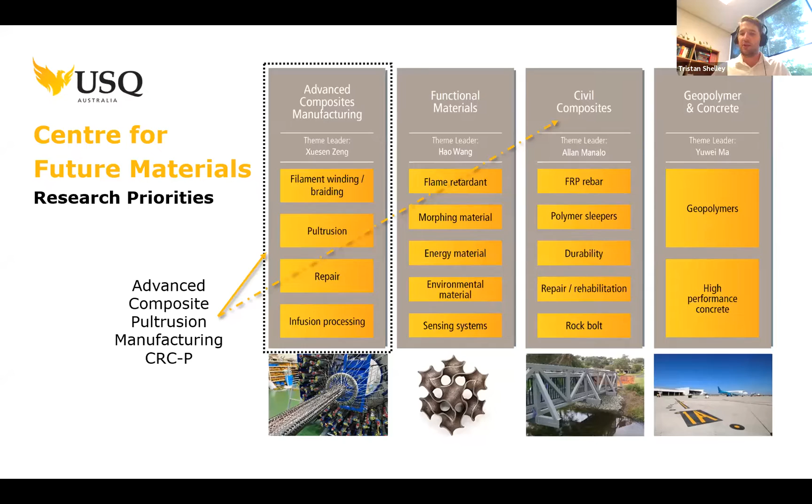We also have a Functional Materials stream, a Civil Composites stream, which this program indirectly links to, and then we also have a Geopolymer and Concrete stream within the centre as well.

So getting into more specifics on the project: pultruded products, and specifically Wagner's pultruded products, can be applied to a number of civil infrastructure applications.

For example, pedestrian structures - this is an example of a mangrove facility in Abu Dhabi. One of Wagner's biggest businesses is electrical crossarms, replacing hardwood crossarms for electrical distribution, road bridges, and other civil structures such as jetties.

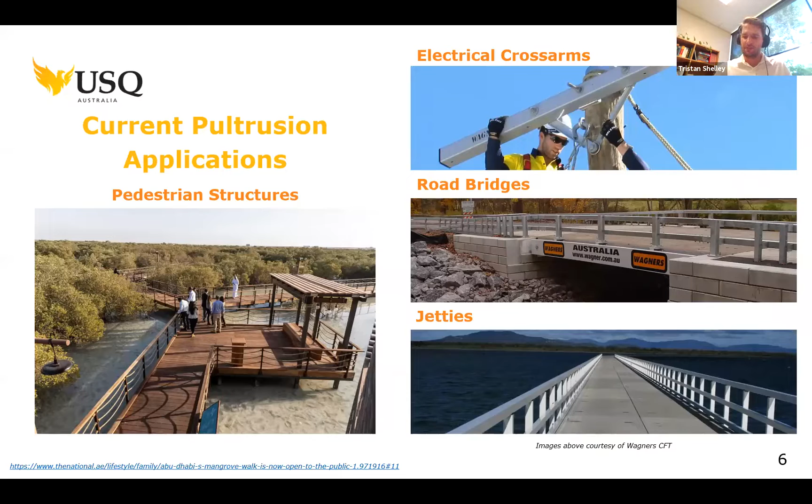As mentioned before, the primary technology that we're working with is pultrusion, which takes dry fibre in rovings or tows that goes through a wet out process, whether that's resin bath or resin injection. That then leads into a curing die or a heated die, where solid product exits the pultrusion die, is pulled through pullers - there's different varieties and styles of pullers - and then is cut at predetermined lengths.

The resin bath is more of an older technology, and this program focuses more on resin injection. USQ also have a Pultrex pultrusion machine, a commercial size pultrusion machine, in which we can trial different novel techniques and methodologies that can't be attempted on a full scale or a machine being used for production.

A few different ways of delivering the fibre to the pultrusion dies: there's just basic creel delivery with unidirectional fibres, and also off-axis or chop strand mats, which are then wet out and go through the pultrusion process.

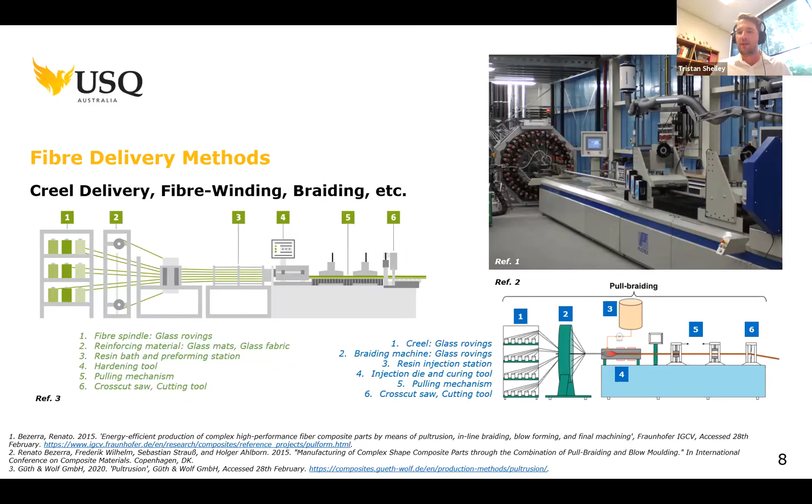Just so everyone is aware, we have acquired a dual ring braider for our pultrusion machine at USQ as well. It's a T4L dual ring braider, which we will be using for this program, similar to the top right figure on this slide.

A little bit of a busy slide, but it gives an overview of the pultrusion manufacturing process and how we are taking it and breaking it down into smaller bite-sized pieces for the research which we're conducting as a part of this CRCP.

We have the fibre delivery, which is our Work Package 3, or fibre architecture, which is looking at analysing and simulating the fibre delivery process and looking at ways of improving the fibre delivery for a reduction or elimination of defects through to the pultrusion dies, and to look at different techniques for improving the performance of the finished pultruded product.

Work Package 2 is looking at the fibre wet out, mainly focused on injection, as that's what our industrial lead uses for production, and using resin bath where necessary for more research activities to feed into production for Wagners CFT.

We're also looking at the flow analysis of resin through fibre stacks, which I'll touch on more later. Work package 1 is looking at the heating and curing of the resin through the pultrusion process, through the curing die, looking at how potentially additives, better functionality of the pultrusion will change the cure kinetics, and also looking to predict how changes in the manufacturing process will affect the final cure percentage or degree of cure of the pultruded product.

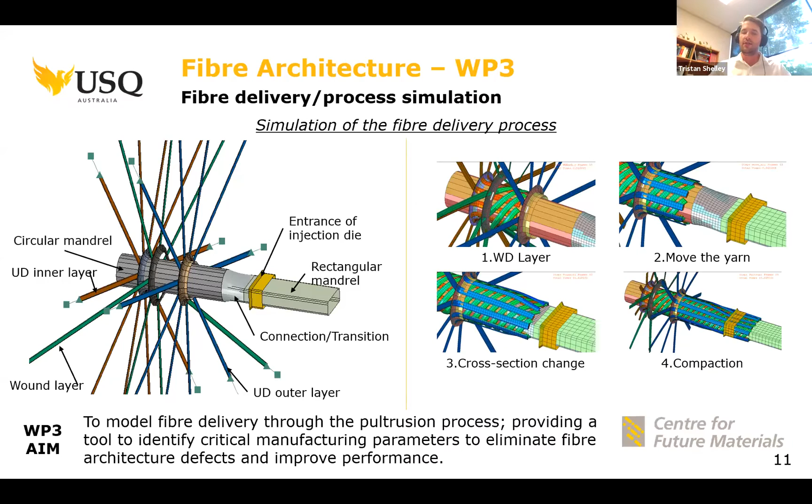Looking at the image on the right-hand side, the top left simulation is the delivery of the wound layer into the process and the unidirectionals. We then move that fiber stack along the mandrel as if it's been pulled through the pultrusion process. A change in cross-section creates defects that can arise as a result. There's also a compaction process as the fiber stack heads into the injection die and the curing die. Using these techniques gives us a better idea, prior to actually making changes on a production line, as to how they're going to affect or influence the quality of the product at the end of the day.

As I alluded to briefly before, we're looking at how defects generate, whether we can predict those defects, and there are a few different stages within which defects can form. One is the deposition of the fiber onto the mandrel when pulling through unidirectional fiber or depositing fiber from the winders onto the mandrel. The second is the transition between the circular mandrel into a square hollow or rectangular hollow section, if we're not pultruding circular sections. There's also some deformation that can happen at the entry to the injection die, and then as the final stage, compaction into the curing die.

I've not alluded to point 4 here, which is some deformation that can occur due to the injection of the resin into the fiber stack. This isn't being looked at in detail in this work package, but will be looked at in detail in work package 2.

There are two main mechanisms that cause the defects: the shear forces between subsequent layers, and the compaction of the fiber stack at various stages of the pultrusion process. Using finite element analysis to predict these, we need to find some way, without the model being too cumbersome or unable to run within a realistic time frame, of representing individual tows or individual rovings in an FEA model.

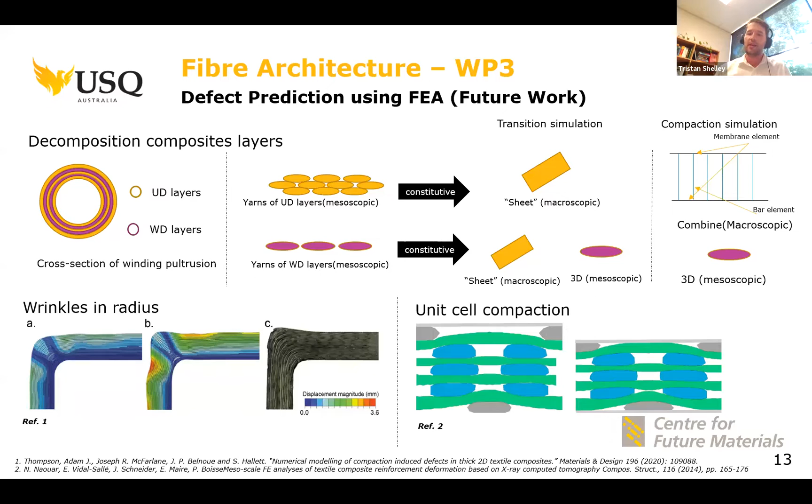Such as a membrane or a shell element or something similar. Apologies if you're not up to speed with FEA terminology, but we're looking at a way to represent the individual tows on a much higher, macroscopic level, so that we can quickly run simulations that give us an indication of how changes will affect the final product.

Moving on to work package 2, this is the infusion work package. We're looking to model the resin injection pultrusion process, providing tools to improve the wet out rates, which in turn allows us to increase speed, and to study novel techniques that may assist us in accelerating the penetration of the resin through the fiber stack.

Just a couple of examples here: blue is no resin, and red is infused resin in the stack. We're looking at, over time, how the resin will penetrate the fiber stack with different porosities, different resin viscosities, and different line speeds. Ultimately, what we're targeting is to see how we can end up with a quicker manufacturing speed while still getting full infusion through the fiber stack.

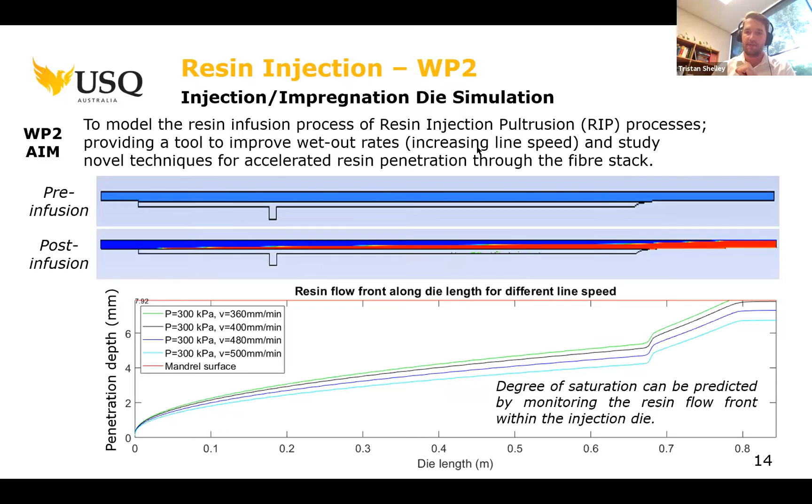So some ways that we've already identified to improve line speed, one of those is simply increasing the die length. That may not be an option for some manufacturers, because increasing the die length means you need a larger envelope within which to mount your dies, and it can also mean your die is closer to the pullers, so you may not have enough time without direct cooling for the product to cool before it gets to the pullers. But all things that can be worked around.

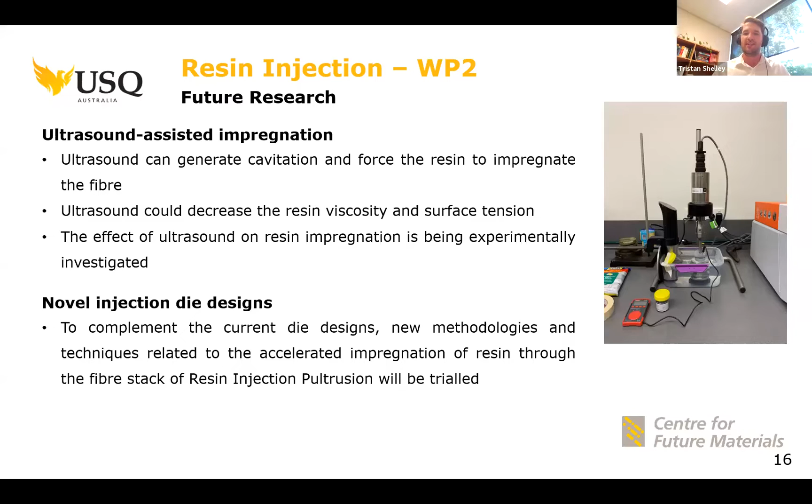Some future research happening is around looking at ultrasonic assisted impregnation, both looking at the ultrasonic treatment of the resin prior to injection, and also the excitation of the injection die for the improvement of resin wet out through the fiber stack, and also looking at novel injection die designs for accelerated impregnation through the injection die as well.

And lastly, resins and additives, work package 1. As a big part of this work package, we're looking at dielectric analysis, or DEA, to investigate the curing performance within the curing die, because the curing dies are a bit of a black box - we don't really know what's happening. DEA allows us to measure what's called the log ion viscosity, or ion viscosity. The sensor sends a current through the resin, and the higher the ion viscosity, the higher the actual physical viscosity of the resin. So you get to a point at which the resin has cured.

So what we're looking to do is fully understand the curing of the pultruded products through the dies currently, but then formulate some new methodologies to improve and accelerate that cure through the pultrusion die.

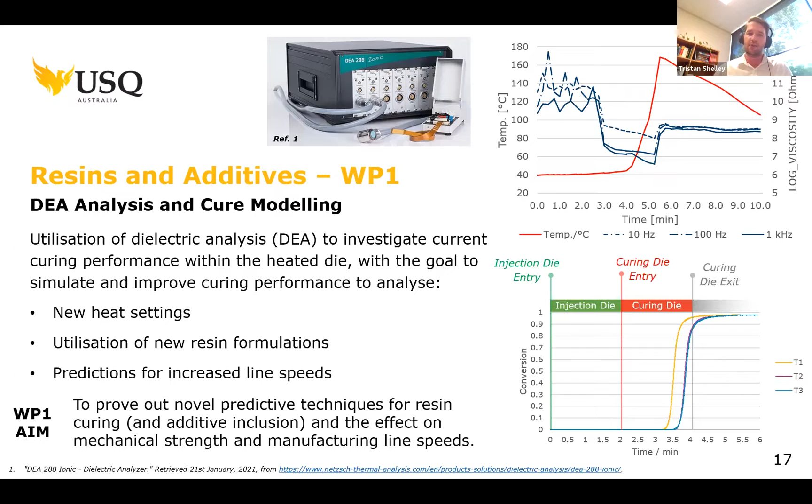One of those techniques is to increase the temperatures within the curing dies. Currently a ramp is used with a set temperature at the start and a set temperature at the end. But by increasing the slope of the temperature ramp, which shows an increase in the first heater zone setting, we're able to show that we can kick off the resin curing earlier within the curing die, which then allows us to increase the line speed of the pultrusion process.

Some future activities around work package 1: investigating the effect of those increased line speeds on mechanical properties, because if you've cured too fast, you may end up with micro cracking within the pultrusion, which may lead to a detrimental effect on the mechanical performance of the pultrusion.

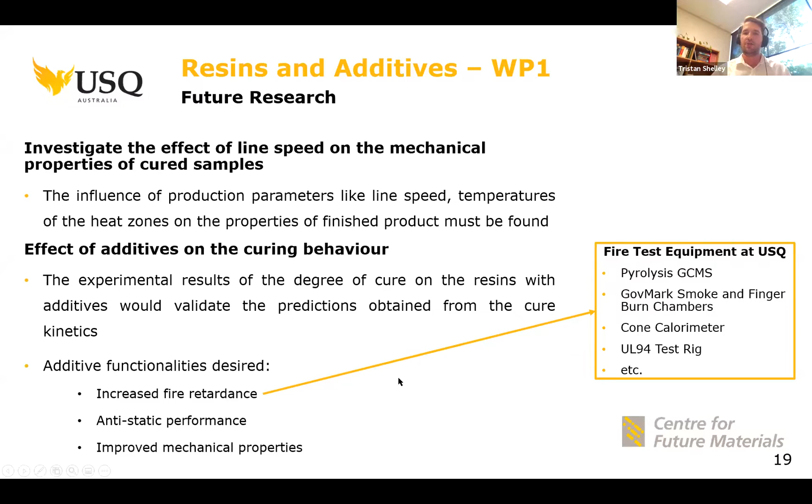So investigating all of the effects of the curing process, and also looking at increased functionality of the pultruded product through the addition of additives. The one major one we're looking at is increased fire retardance, which Dean will touch on in more detail later on. We have a large suite of fire testing equipment at USQ, which I won't go into detail with, but we're also looking for other functionalities such as anti-static performance and improved mechanical properties through the addition of some additives as well.

So that brings me to the end of my presentation. Do we have any questions from any of the attendees?

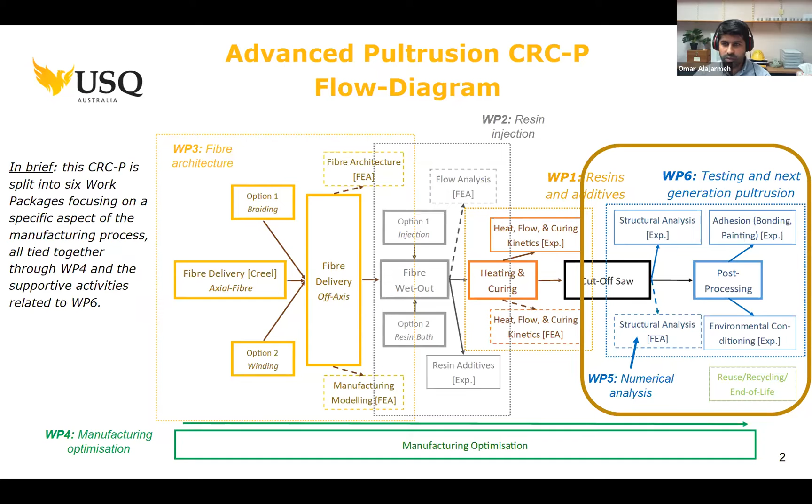Starting from the numerical analysis and how that connects to the experimental, and what we can do in terms of experiments in our facilities here at USQ. The point of having numerical simulation in this project is more about validating the experiment and going further to optimize the profiles and find out the critical parameters that can affect the structural performance of the pultruded sections.

So we have charted that, starting from the material constituent tests that we can rely on to do the pultrusion, then doing small scale testing to find out the laminate properties of the composites. After that, we can do large scale testing to simulate the real testing in the field.

That input will go to the FEA model to build up the model and try to validate the experimental results. It's not only validating the behavior or the failure, it's also validating the internal stresses inside the pultrusion and finding a great matching between the behavior of the FEA and the real testing.

In the next stage, we are heading to a parametrical study to assess the parameters and determine which one is critical, and how we can come up with an optimal design for the pultruded composites. If we see there is room for enhancement, we give a recommendation for the pultrusion to implement that suggestion, then go again to the pultrusion and extract some samples afterward to validate our recommendations.

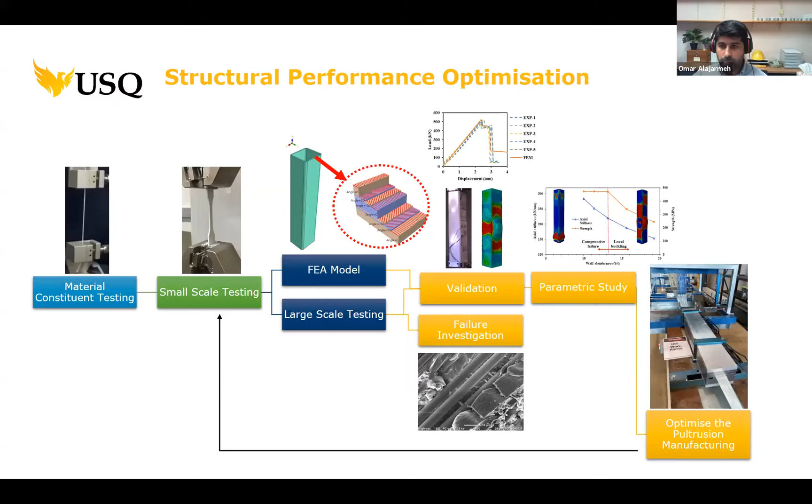We had a number of software options, but we are relying more on Abaqus to do some steps to build up our models and find the validation of the experiments. The good thing is we are not only looking for validating the experimental results, but we are looking for establishing a solid and sound methodology.

That methodology can validate the experimental results in the easiest and quickest way, and can run the models many times. We have implemented many approaches, and we ended up with a very good methodology that can capture the behavior of the composites and capture the instability of the composites, because we are talking about thin wall structures that suffer from instability behavior.

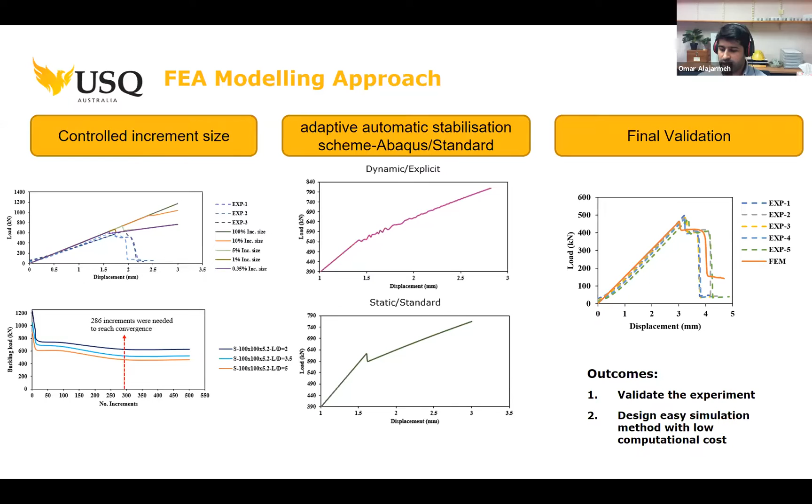After that, we plan to go to the parametrical study to select which parameters are critical to the pultrusion and how we can modify and enhance the performance of the composites. We set up very critical parameters, starting from geometrical parameters and layup parameters, and we studied all of these parameters separately and in combination to see the effect of these parameters on each other.

We found that some parameters are important, and others are very important for composites. This is the main point of doing FEA: to find the optimal design of composites and give confidence in the final product that there is no weakness in it afterwards. That affects the design, the material usage, the money and the profit after that.

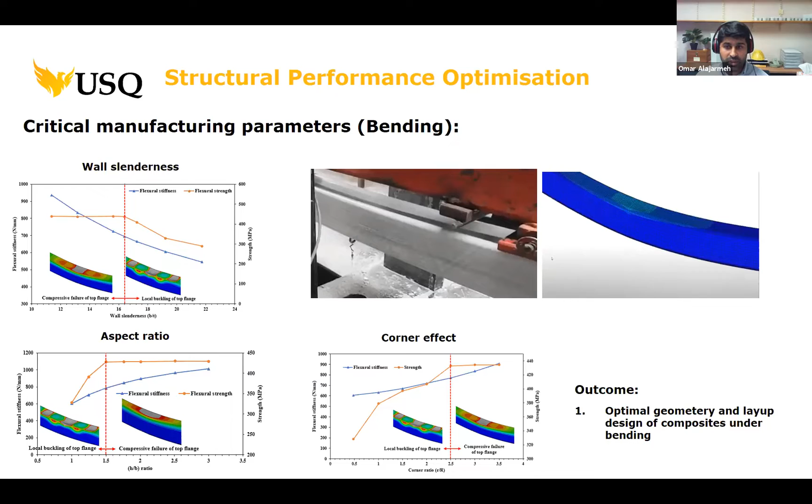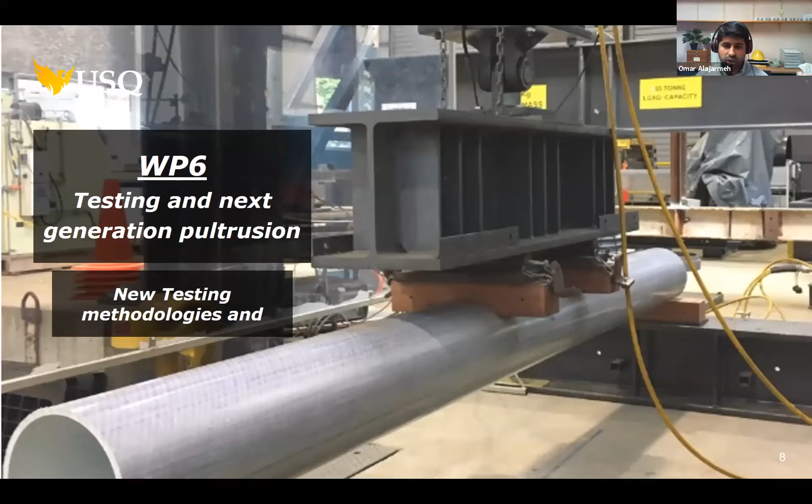So in the structural lab, we are testing the ideal sections, or the one with a full cure, and the one with different pultrusion manufacturing parameters, such as line speed, additives and all of these things. In practice, speaking about the hard work and testing for composites, how we can identify the structural performance of composites, and how we can suggest new testing methodologies that we can standardize after that, since there are no standards or methodology to test full scale composite structures.

Starting from our facility, and what tests we can conduct there: we can do structural tests, small scale and full scale tests. We can do environmental tests as well. We can do fire tests, preliminary tests on that. We can also do thermal and physical tests and checks on the composites.

Looking at the small scale tests, we have sufficient fixtures and jigs to do the standards assigned for composites for small scale testing, and we can do basically all the tests needed to characterize the composite. The purpose of doing that is to know the laminate properties of the composites, and for that to be a feedback or raw material for the FEA models, to build up our models afterwards.

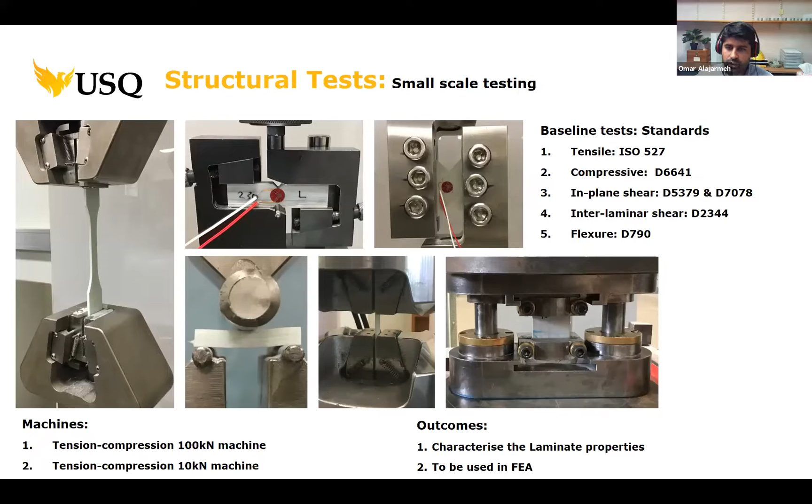Afterwards, we have the capacity to do full scale testing under compression, bending, shear, and all of these things. Those tests are validated from FEA, and by doing these tests we double check the structural performance of the pultrusion product after that. It's also about finding the true behavior of those things, to be used afterwards in the design of the structural elements.

We have sufficient tools, rigs and machines to do those things. We have three various size loading frames, up to 2000 kilonewton. We can implement columns, beams under those machines. We also have a fatigue rig with a 500 kilonewton capacity.

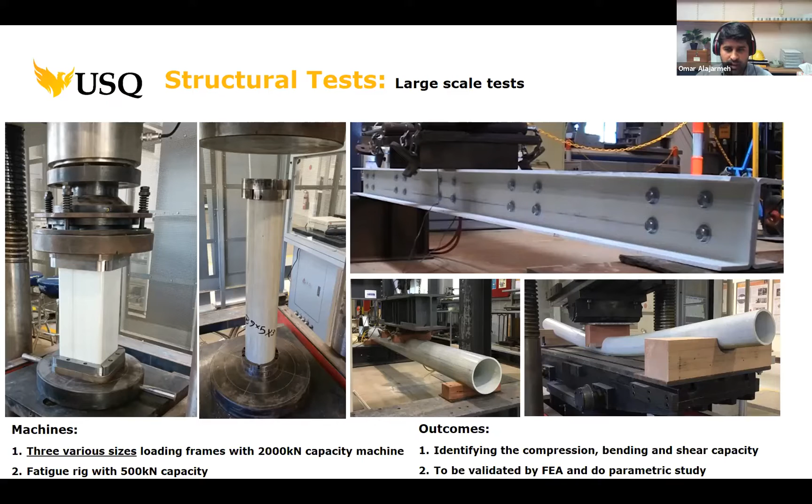After testing those things, we are not only looking at the load displacement behavior, for example, but we dig in deep to analyze the failure and the failure progression of those composites. The reason is to identify the weakness points, so we can make a recommendation for the pultrusion afterward: this is a weak point, you can implement or modify or strengthen it by doing these steps. We are using many microscopes that we have, and also SEM, so we can see the bonding and the interface between the fibers and resin, and what the interface between them is.

All of these tests we can do with a special touch from USQ. As we know, there is no standard for testing full scale structures in composites, but we were able to introduce and design new testing rigs that we can rely on to get the true behavior of the composites, starting from end fixtures and loading points for the bending. We were able to get a true behavior out of those composites and get rid of any failure concentration, failures from stress concentration at the ends and the interface between the loading point and the cross section.

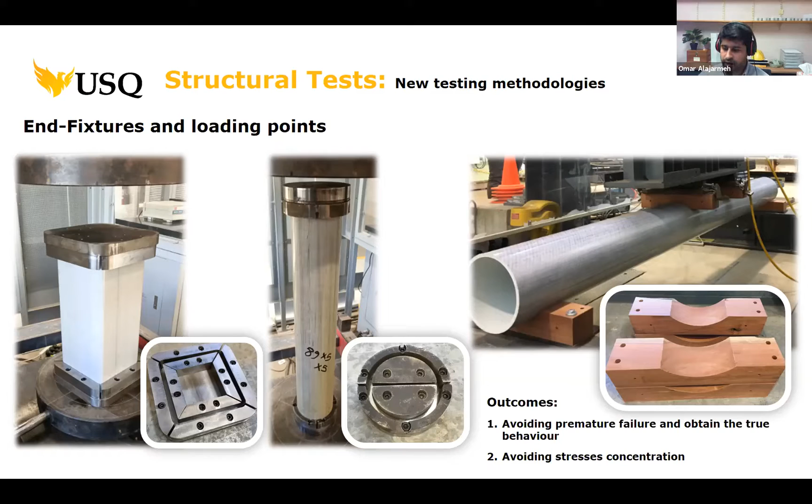Beside that, we have also been successful in suggesting new methodologies to characterize the curved sections, which no one has done before. We were able to do coupon testing in compression and tension using a special design for end fixtures. We also developed a transverse compression methodology for rings or pipelines, to get rid of the ovalization that happens when you apply a load to the ring or pipeline. That gave us very confident and sound results afterwards.

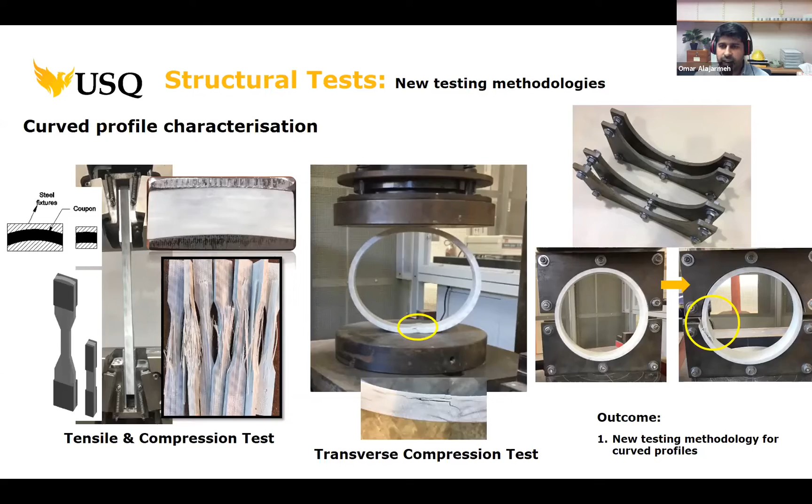I need to highlight something here. More important is we have special tools such as DIC, not only to capture the results during the test, but also to validate and give us confidence in what we are doing here at USQ. We also double check the FEA models using the DIC, and even double check the theories built up before on the composites. It helped a lot in identifying the local bucklings and identifying the failure features of the composites.

After the pultrusion, there are many post-processing steps that the manufacturer uses, especially drilling holes, inserting some insert inside, doing bonding and painting. We were able to benefit from the square sections to introduce new cross sections, like the figure you see on the left hand side at the top. We were able to introduce new I sections, C sections, and L sections out of the end product, square end product, and the results are quite sound on that. So we can also benefit the manufacturer to increase the product sections and increase the design guidelines on that.

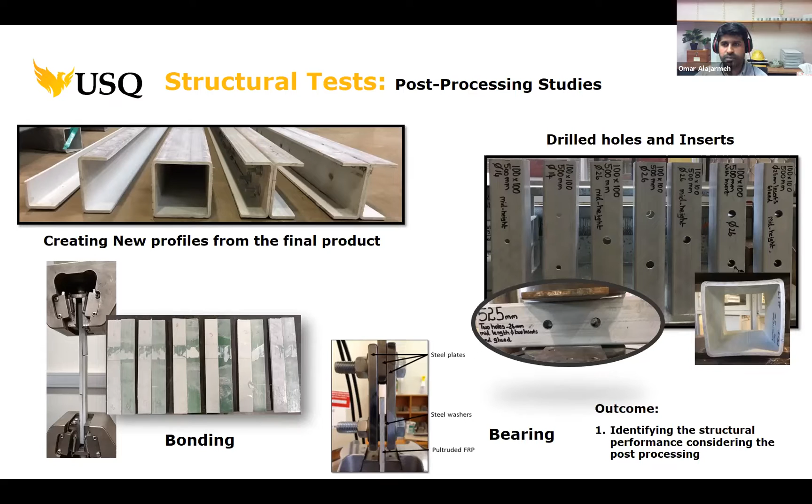Aside from structural testing, we have done some preliminary fire testing on composites. We have two main rigs to test the smoke density of the composites, toxicity, and also to characterize the ignition properties, starting from the start point of the ignition and the duration of the ignition. You can see here some of the test results on the composites that we have done. That can also be extended to test the fire performance of the composites with fire retardant and with special painting and coating of the composites.

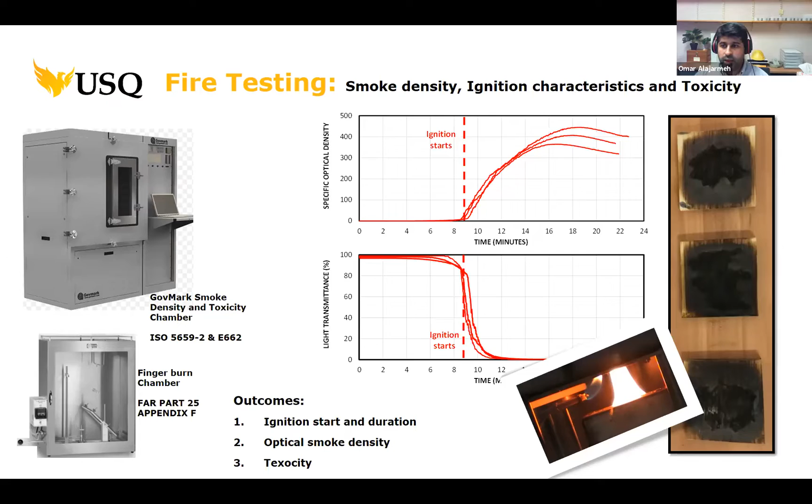We also have done, and are managing to do, environmental testing of the composites, relating to accelerated ageing applied to the composites to find out the life prediction of the composites. We can apply many conditions on the composites, starting from UV radiation, going to the hygrothermal effect including moisture and temperature, and we are also going for elevated temperature testing of the composites. The aim of that is to initiate some master curves from the real testing time and extend that to see the life prediction of the composites in years.

All of these things and facilities are happening at USQ. We are also managing to do as many tests as possible in the future, and we have the ability to expand our research further. So this is the end of my presentation, and I'm happy to answer any questions from you guys. Thank you so much.

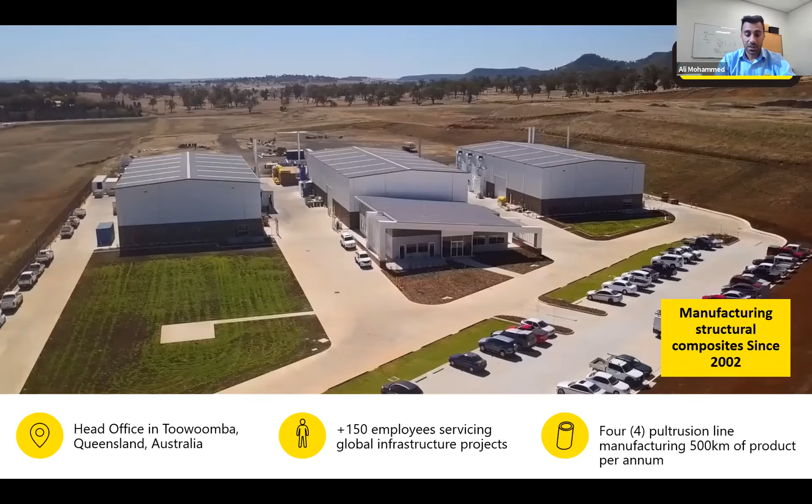So a sneak peek about the factory. As you can see here, these are our 4 pultrusion lines. The first pultrusion line started back in 2002, manufacturing all various sections. And as you can see in the back, that is the glass room where all the glass is kept, and also where the unique pull winding process of Wagners CFT is located.

With this unique pull winding process, it's giving us the high fiber content, which will result in better mechanical properties, as I will explain in more detail in the coming slides.

Next, this is a summary of what we are currently manufacturing in terms of structural hollow sections. So we manufacture circular hollow sections, square hollow sections, and rectangular hollow sections, and each of these can be produced with different sectional geometry and properties, and with different wall thicknesses to cover a wide range of applications.

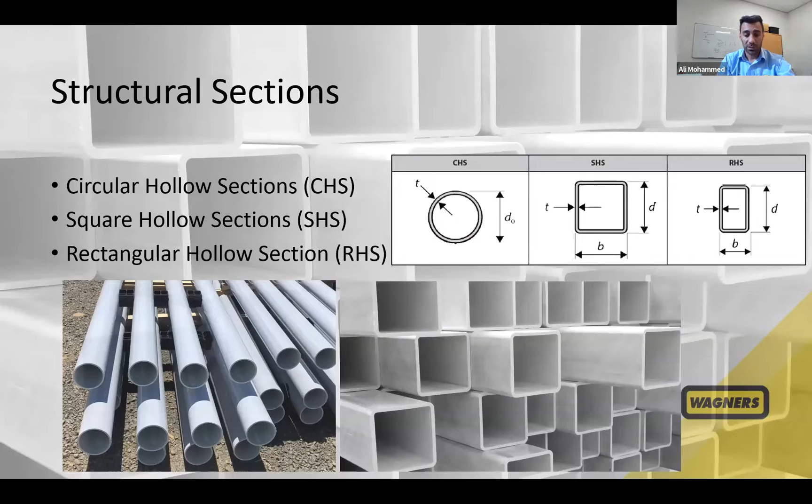that would definitely result in very high mechanical properties, as we can see in the next slide - the mechanical properties of Wagner's pultrusion with a tensile strength of over 600 MPa and a modulus of over 35 GPa. These are the characteristic values as per ASTM D7290.

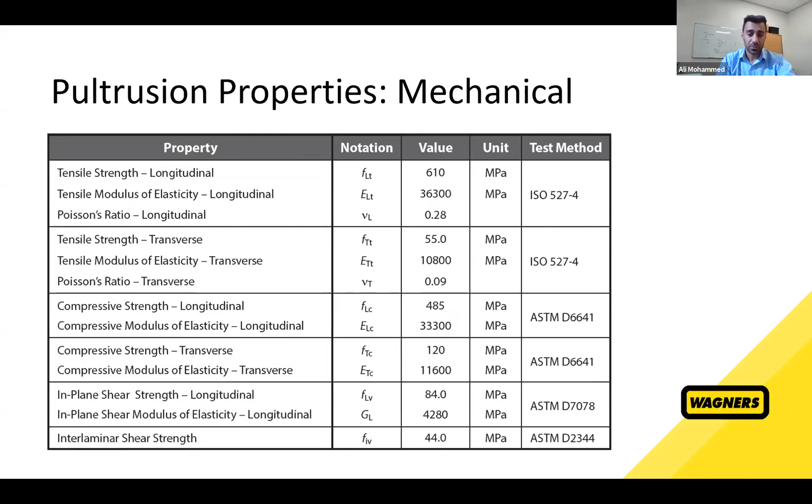So all these products require minor finishing, minor modification on the surface to suit that specific application. For example, for the cross arms, we need special surface treatment to give it the proper electrical properties, and this kind of surface treatment is not required for the pile - it's the same for every single application.

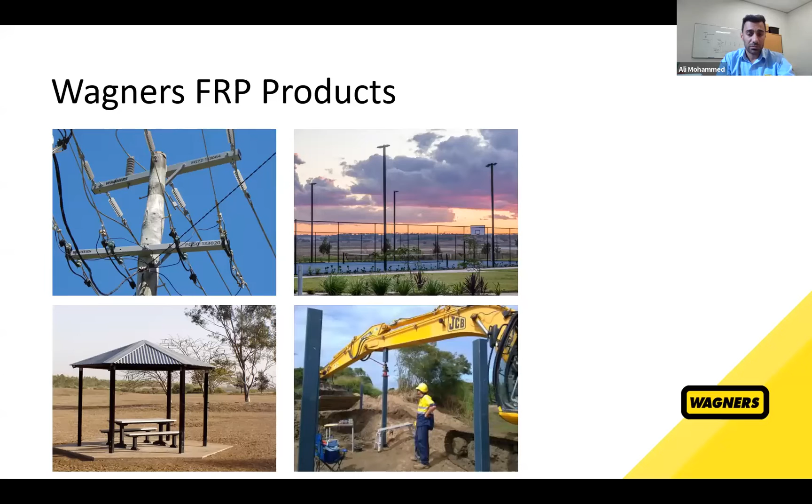With this bonding technique, we can produce and fabricate larger structures, as we can see in the next slide, with a few examples where Wagner's FRP sections have been used - in road bridges, staircases, and many other structural applications, like over 1,000 boardwalks and pontoons, and many other marine applications.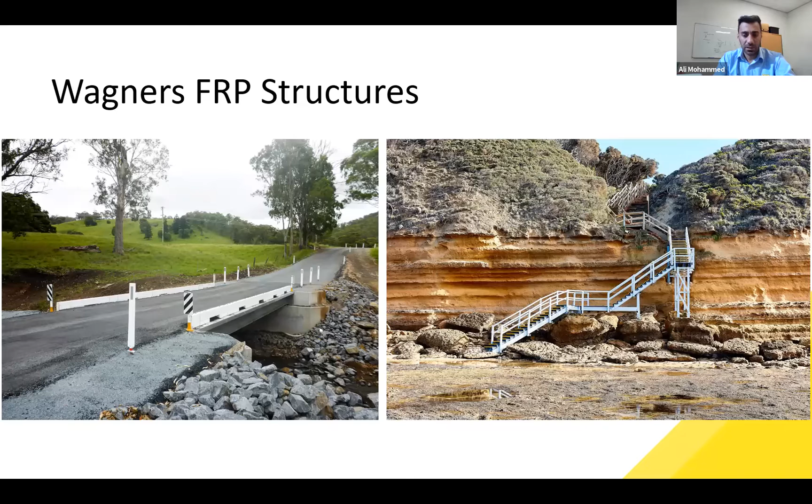So the next venue that we need to conquer is the FRP utility pole. Why does the next section need to be used as an FRP utility pole? Due to the huge demand in the market for FRP utility poles, or FRP poles in general, we decided to jump in with bigger sections to meet the structural requirements of utility poles.

And why FRP? As you're all aware, because of the superior properties of the FRP composite material compared to traditional materials such as timber and steel, and also the environmental performance of FRP composite material in general, where less carbon emission is produced due to the overall process of FRP fabrication and utilization, as shown by many studies about the life cycle assessment of FRP composite material.

So for the design requirements of FRP utility poles, there are various requirements to be met to fabricate or manufacture an FRP utility pole. The first one is fire resistance. The fire resistance of FRP utility poles needs to meet the BAL 40 requirement, as you can see in this photo - it's the next phase after bushfire, where the first phase is the flame zone, and the next one is BAL 40, which is a very harsh condition to resist.

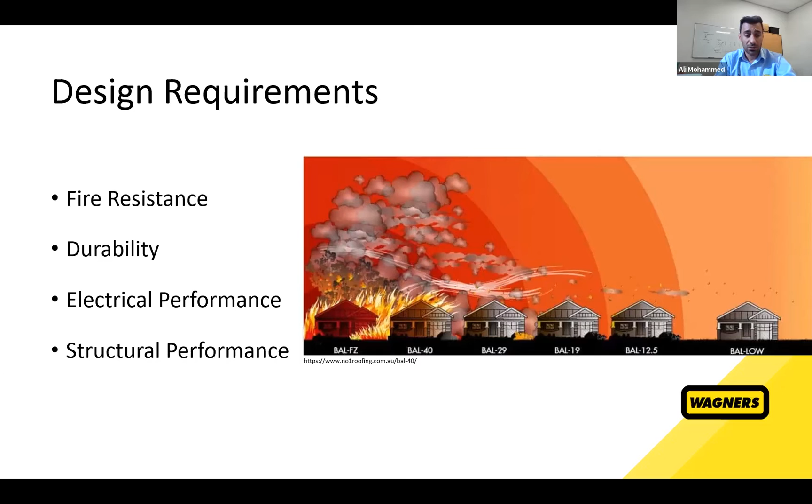And the final one, which I'm going to talk mainly about, is the structural performance of the future FRP utility poles. So the FRP utility poles need to meet the serviceability limit state and the ultimate limit state as per AS/NZS 7000:2016, which is the Australian standard that has been used for the FRP utility poles.

So what is being done here is we have done structural testing according to AS 7000 on the current profiles that we have, to establish the flexural strength and the full section flexural modulus on the current profile, and extrapolate the values that we got to the design of the future profile to meet the same structural requirement.

In the next slide, the full scale testing is shown, following AS 7000, and this sample is being loaded till failure. As you can see in the graph shown in this slide, the sample behaved linearly till failure, which is expected from FRP composites.

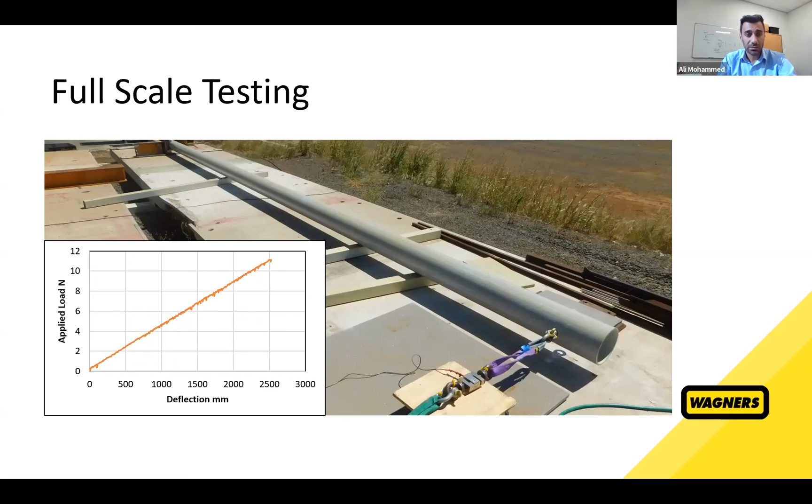So following this full scale testing, before going to the structural analysis, we need to talk about the failure mode, how the sample failed. The sample failed at the ground line, at compression failure, at a moment of 110 kilonewton-meter, which is what we were expecting.

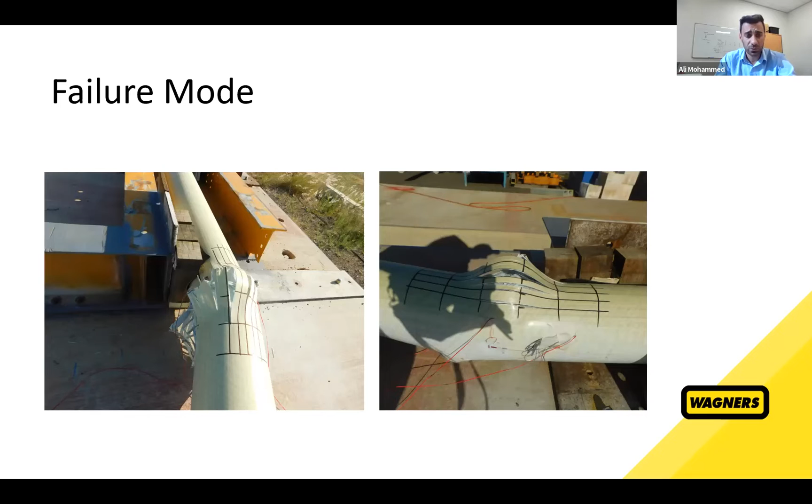Following this full scale testing, structural analysis has been done using SpaceGass software, and a spreadsheet has been developed to ascertain the sectional properties that we need to achieve the design requirement for a future utility pole, which we need to meet at 4 kilonewton and 6 kilonewton tip load at the top of the utility pole.

Further FEA analysis has been done where the experimental result has been verified, looking at the layup and the wind angle of the future FRP utility pole. As we can see in the graph on the left side, the experimental results are matching the first model that has been done on the current wind angle with 50 degrees. Then with the validated model, the wind angle has been changed and reduced by 20 degrees, resulting in an increase in the flexural stiffness and flexural strength by around 7 to 8%.

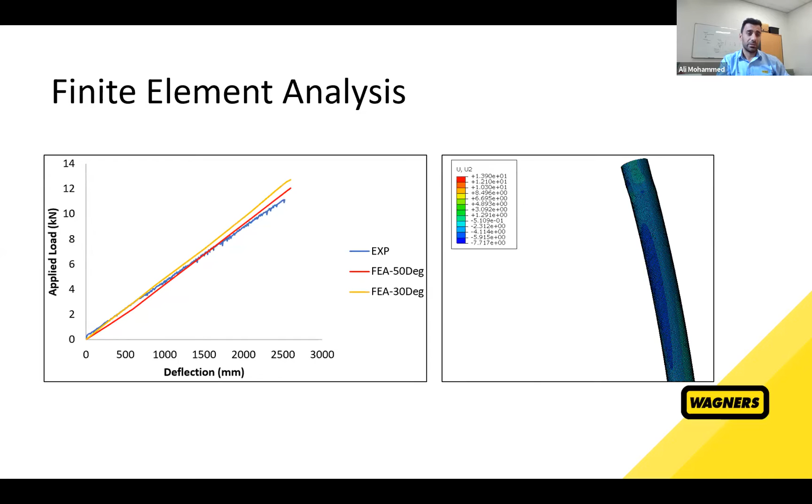Here I conclude my presentation for today. I have presented various FRP products made of our FRP sections, and what I've presented are only a few examples of what's actually been used. In this photo, you can see our FRP composite product used by another company, Composite Stands, that we worked with together to develop this product.

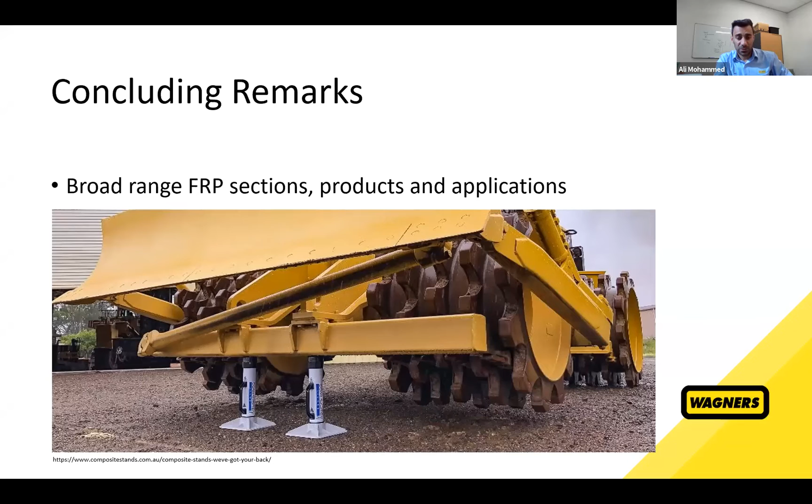It's being used as a jack stand for heavy machinery, replacing steel jack stands, and the weight of this composite stand is a fraction of the tremendous and heavy steel jack stand. So if you have an application and you believe FRP composite would be the solution, feel free to contact us on my email, and we can work on developing the future product together. Thank you for listening, and let's see if there are any questions.

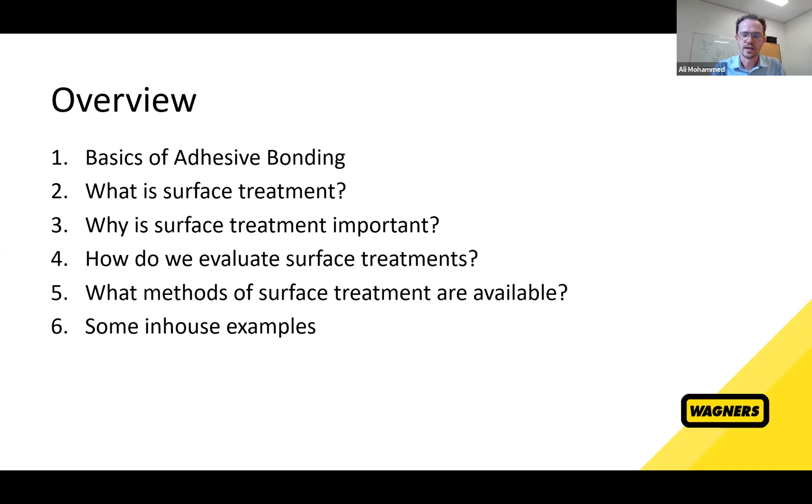Just very quickly about me, I'm a mechanical engineer. I've been here almost 3 years, and I work in the R&D department, doing a whole array of things, but particularly on this subject, a lot to do with bonding, polymers, adhesives, and coatings, all very relevant to Wagners Composites as a whole, where we do bridges and boardwalks, and we paint things and bond things together.

So adhesive bonding, what do I mean by that? I mean the process whereby you are joining materials together with an adhesive. The materials can be of the same type, or they can be dissimilar types, but it finds an application in almost all industries. Aerospace, wind generation, power generation, medical, almost everywhere you've got applications of adhesive bonding and bonding materials together to form a structural bond, so to speak.

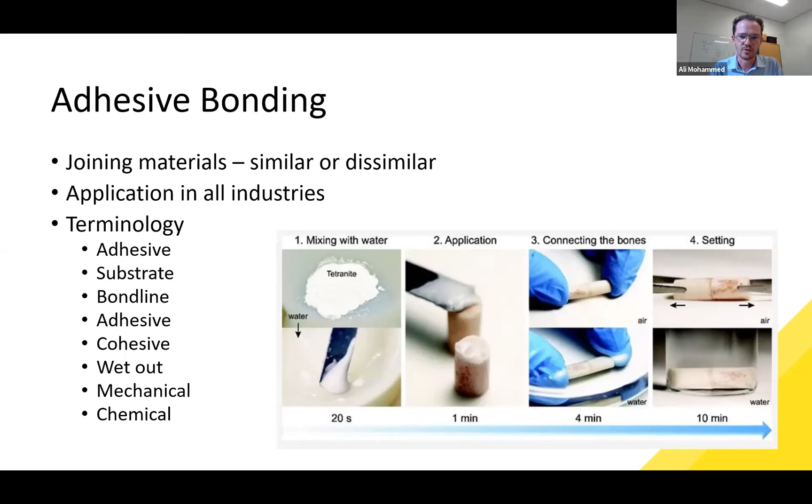A whole bunch of different terminology is used in this field, adhesives, substrates, bond lines, etc. I'll try and keep it as basic as I can for those of you listening who are not too familiar with this field. But just on the right there, for interest, they've even developed an adhesive for repairing bones up in the space station. They call it tetranite, and it can be used to glue bones together. So even our astronauts are using adhesives for medical purposes. Such a very broad range of industries, and it can be quite amazing to see it being used for a variety of different things.

So the bond itself, the adhesive bond, is formed typically of the substrates, which are the materials you want to bond together, and then the adhesive. Obviously, it forms a sandwich of the two substrates and the adhesive in between. The area directly where the adhesive touches either substrate is called the bond interface.

So the role of the adhesive is to essentially form a structural bridge between the two substrates, and that takes the loading conditions and also transfers the stress from those loading conditions between the two substrates. Effectively, you want to join two substrates together to form a cohesive material via this adhesive.

The main critical requirements for an adhesive bond are obviously the adhesive properties themselves have to be strong and tough, and have the right elongation to suit the expected stresses and loads. Then the details of the actual interfacial bond between the adhesive and the substrate - you want either a chemical bond, a mechanical bond, or ideally both. Then the actual wet out of those substrates via the adhesive is another function, and also governs the interfacial strength. So today we're looking in depth at the wet out, or how the adhesive coats each substrate to give a very high surface area for the bond, so to speak. Obviously, there are other aspects to the bond as well, such as mixing your adhesive properly, curing it properly, etc.

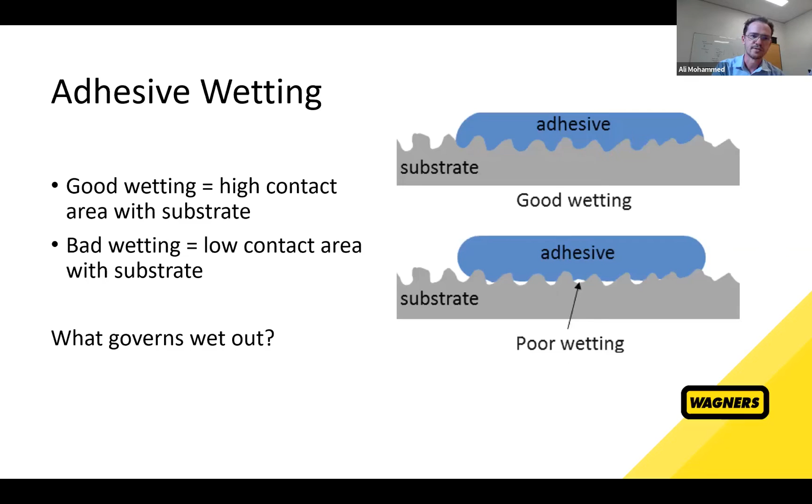Well, let's look at what governs wet out, and that is a term called surface energy. All surfaces have what's called surface energy - essentially the attraction force on the surface of that material. High surface energy materials have atoms very strongly attracted to each other, resulting in a very high attractive force on the surface. The opposite is a low surface energy material where the atoms are not so strongly attracted to each other, giving a low attractive force on the surface.

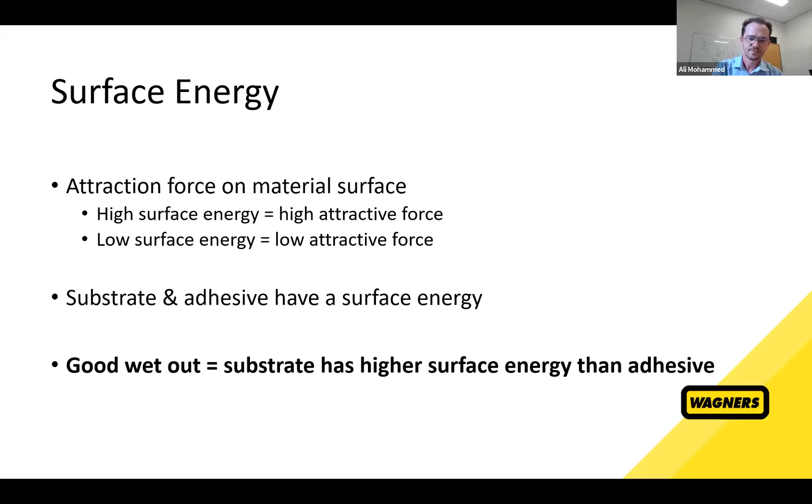Both the substrate and the adhesive have a surface energy, and it is measurable. To get good wet out where the adhesive flows across the surface well, you want a substrate with high surface energy, and ideally a higher surface energy than the adhesive. High surface energy is a high attractive force, so the adhesive is going to wet out the surface.

When we look at CFT and composites in general, there are a few difficulties with looking for high surface energy for good wet out. The main one is that glass fiber composite has an inherent low surface energy, so it's difficult for an adhesive to wet the surface out.

So from the get-go, we need to look at options to increase our surface energy for better wetting out of the adhesive. We also use other materials here on site that are all very low surface energy materials - polyester plastics, polyolefin plastics, and also fluoropolymer type materials. These are all low surface energy materials, so in general we have a difficult time bonding here on site.

The other aspect of a good bond, aside from surface energy, is the presence of any contaminants on the surface before you bond. Contaminants can take the form of dust or fingerprints. A big one is obviously silicone contamination. Silicone is quite often banned in a lot of industries, aerospace et cetera, where they do critical and large scale bonding, because it is such a bad industrial contaminant. Even a tiny amount of silicone on the surface can affect your bond quite significantly.

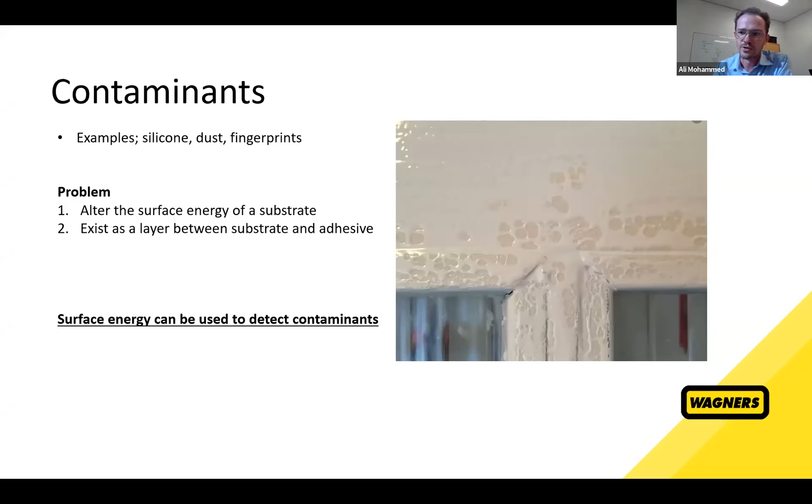So just to summarize the last couple of slides, what do we need for good wet out of our adhesive onto these substrates? We want high surface energy of our substrate so that adhesive flows across, and we want a clean substrate, so no contaminants on the surface. If we achieve both of these things, we should be getting closer towards a good bond. Obviously, there's a few other factors as well. But how do we actually assess whether we've achieved a higher surface energy and a clean substrate? How do we assess and evaluate our surface before we bond to it?

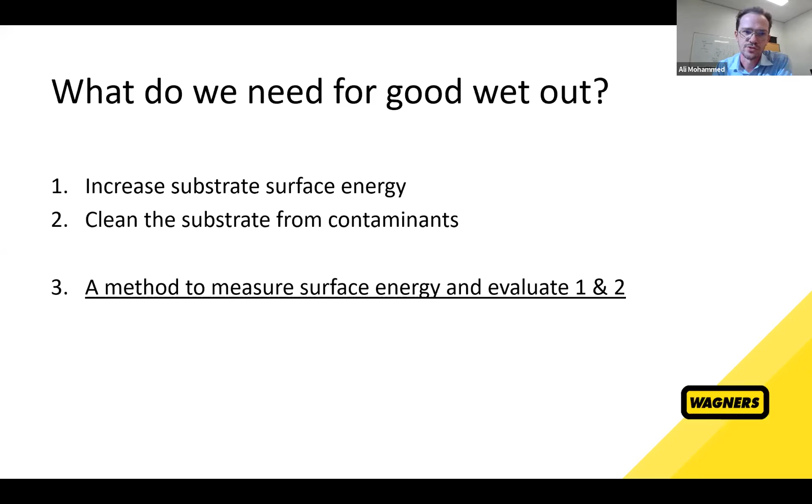Before I answer that, I've got a real life example I found from back when the F111s were in operation in Australia. They were finding the sandwich panels were delaminating and debonding, and they found a large number of them were from repairs where there was no surface preparation. It highlights how important surface preparation is to eliminate or reduce your defects and improve the consistency of your bonds.

So we've asked ourselves, how do we actually measure or evaluate the surface energy of a surface? The most common way to do it these days - back in the day they used dyne pens and various other things, whereby you were given a set of pens to mark a surface, and that pen would indicate whether the surface was high or low surface energy and give you a rough approximation. But these days we've gotten a lot more advanced.

The best way to do it is if you've got a consistent way of measuring. Your substrate's the variable, and you want to know what the surface energy of your substrate is, so the way you measure it should be consistent. You start off with a liquid, most often some sort of very clean water, and use a water drop and how it interacts with the surface to assess the surface energy of that substrate.

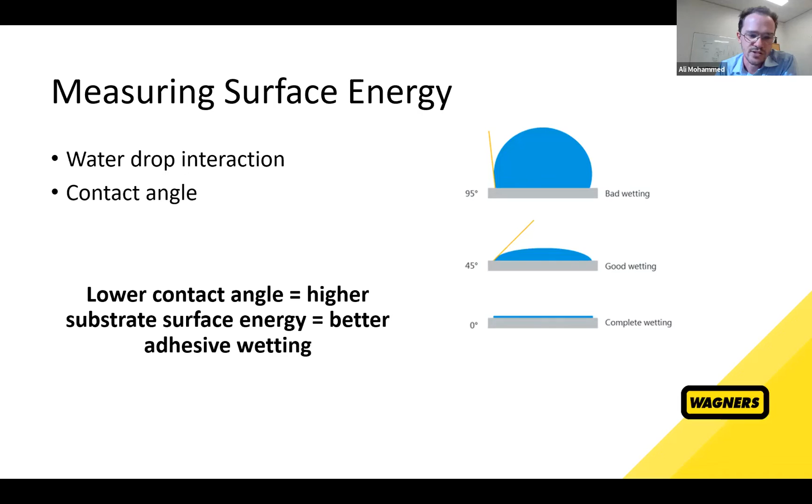If you can somehow apply a drop of water to the surface and look at how the drop interacts, you can get a very consistent way of measuring the surface energy of that surface. Now, they've made machines that do this. A variety of different suppliers make machines that fire a drop of water at the surface and then can tell you exactly what the contact angle of that water droplet to that surface is. You can then use that to consistently determine the surface energy of your surface.

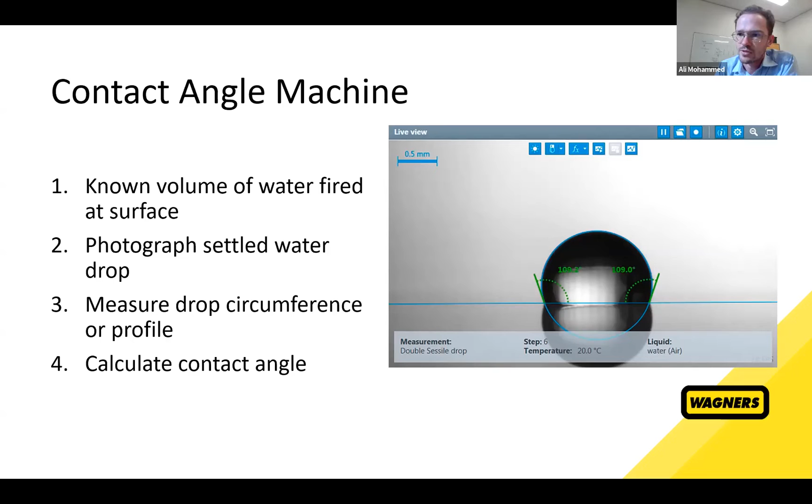It fires a known volume of water at the surface, and then photographs the drop sitting on the surface. Then, either from a side profile or top view, it calculates the contact angle of that water drop. On the right, you can see one of the many pieces of software that can do this process. Here at Wagners, we've got a very portable piece of equipment that does this for us. We can use it to check the contact angle of almost any surface, whether it's horizontal, vertical, or upside down. These are available from quite a few manufacturers around the world.

We found it to be very handy, and it's still teaching us things every day in terms of our bonding process and things we do here at Wagners.

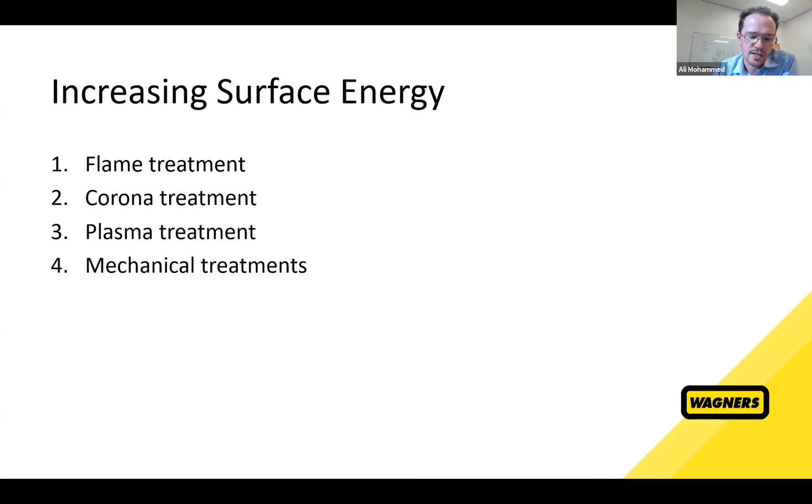So if we go back to our list of what can we do to better prepare our surface, one is increasing the surface energy, making the surface easier for the adhesive to wet out. There are many options available for increasing the surface energy of difficult to wet substrates. Here are a few: flame treatment, corona treatment, plasma treatment, and mechanical type treatments. We've tried all of these here at Wagners, and I've seen good results with some and not so good with others. It's very dependent on what your application is and what you're using your substrates for.

The first one, and probably one of the most common, is a flame treatment type unit. It's a gas flame, commonly butane or propane or some sort of flammable gas, in the shape of a very high energy jet. It's typically got two cones - the jet, and the inner cone, the darker, more vivid blue cone, which is the reactive part of that flame. When that flame is run over the substrate, it gives the substrate a higher surface energy because the flame is chemically active, so to speak. It changes the substrate surface and gives it higher surface energy and a better bonding surface.

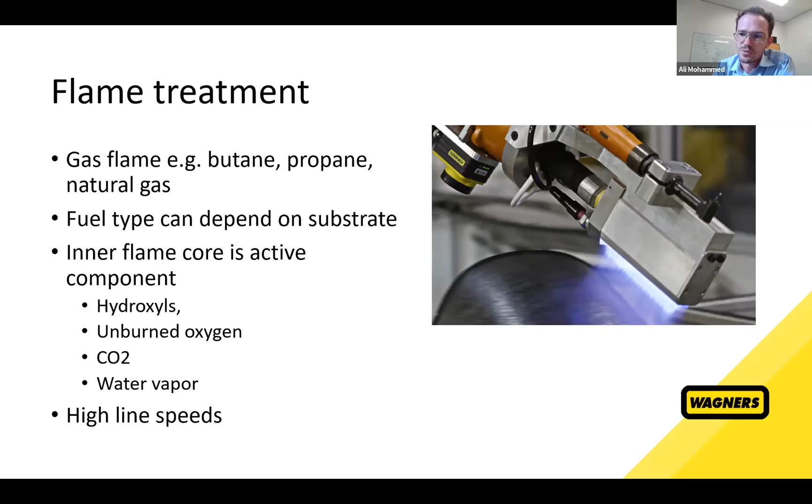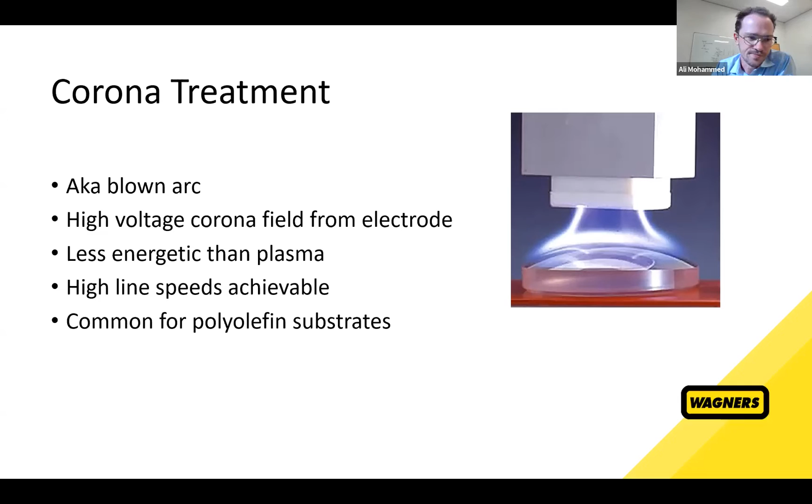The next one is corona treatment, whereby high voltage, high frequency current is passed through an electrode, generating a corona type field. On the right, you can see what it looks like - a blue field, and you can use this to run over your low surface energy substrates to increase their surface energy. It's also known by the industry term 'blown arc'. It's quite good for high line speeds, so if you've got a continuous plastic processing operation or some operation that requires high throughput, it's quite good for that. It's very common for treating your polyolefin type plastics or polypropylene, etc.

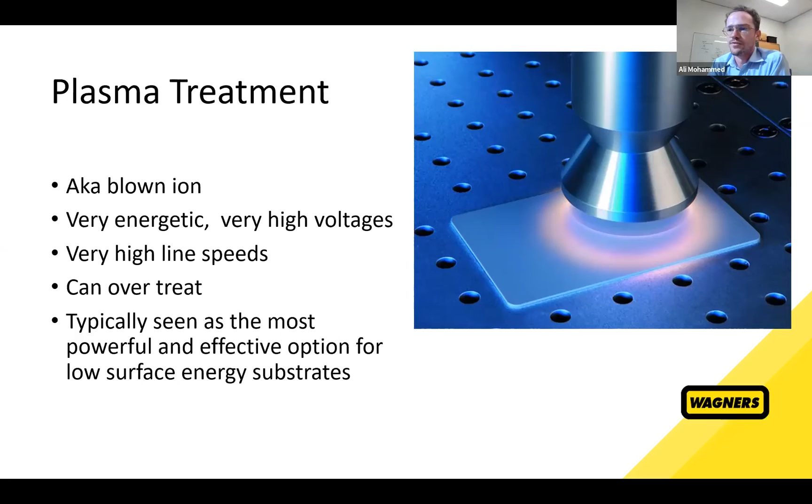The third one, and probably the one that's considered the best, is plasma, or 'blown ion' as it's called. It's a very energetic, very high voltage type of surface treatment. It can achieve very high line speeds because it's so energetic - it doesn't need much time to increase the surface energy of a substrate. However, it can overtreat if you're not careful and haven't calibrated your line properly. You can see detrimental adhesion from overtreating with plasma. As I said, it's typically seen as the most powerful or effective option for low surface energy substrates.

The other option, which is a bit different but can also be used to modify or treat a surface, is mechanical type treatments. That's abrasion, sanding, or grit blasting, something that etches the surface or gives it a different texture or feel. There's a few different benefits, not just one.

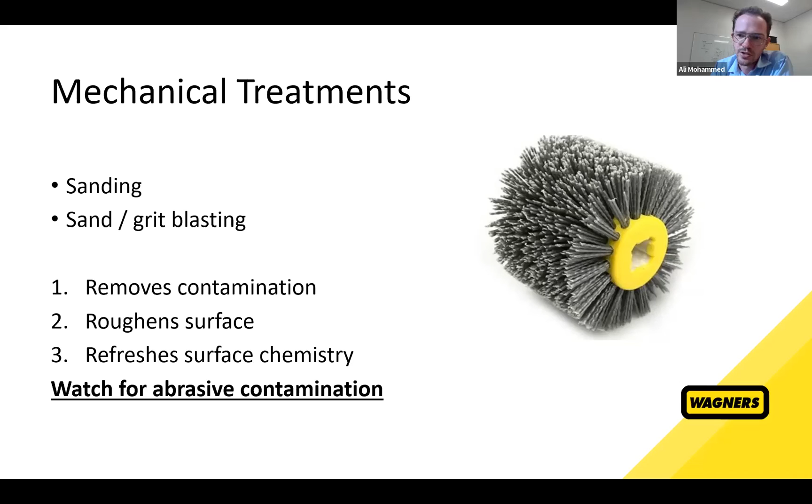So mechanical treatment can do quite a few things and can definitely bring benefit to a bonding process. One thing I will note is that if you're using an abrasive process, watch for contamination. If the abrasive itself contaminates the surface, or for example this nylon brush smears on the surface or gets hot, it can leave a contaminant behind. So you always have to be careful with physical contact applications that you're not worsening things by leaving something on the surface.

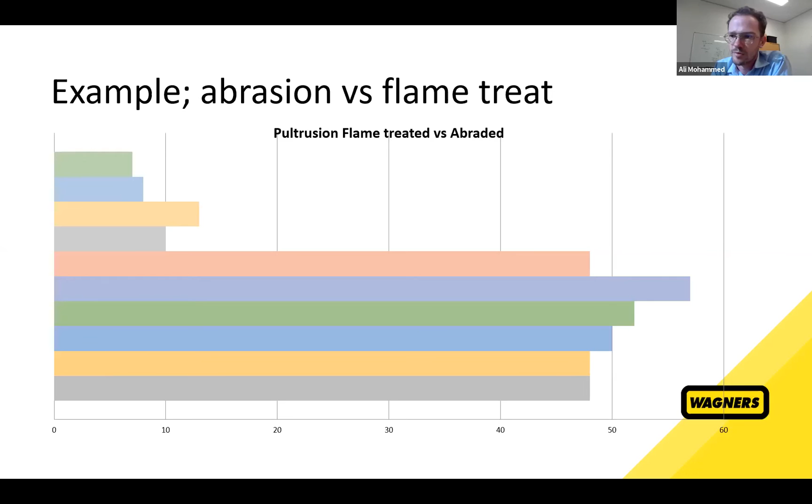One other thing I'll mention in terms of contaminants - we looked at how to increase surface energy, but the other thing is how to deal with contaminants on the surface. The most common way, just to touch on it briefly, is cleaning with a solvent - acetone, ethanol, MEK, all that sort of stuff is commonly used in industry.

Just a few notes - when doing this cleaning process, everything has to be clean. If you have a contaminated substrate and you wipe it with a clean cloth, you should never re-wipe that surface with that same cloth. You should always use something clean on the surface every time, otherwise you'll just be redistributing the contaminant back onto the surface as you wipe over and over.

So you want to use fresh solvent, fresh cloth, and the right wiping methods. You can either develop your own wiping method, or there's a bunch of standards out there you can use to see what the industry uses in terms of wiping method - do you wipe in one direction all the time, or two directions, etc. There are definitely standards out there you can visit or look into yourself.

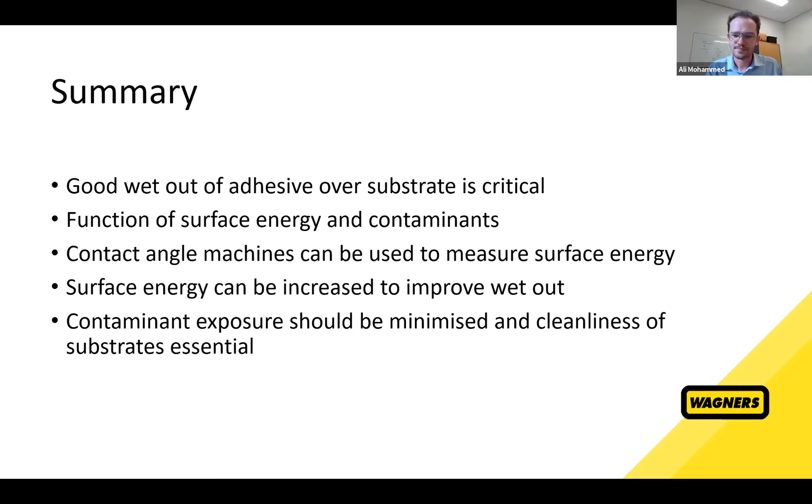So, anyone got any questions?

So I'll give a bit of background on Allnex. I'll keep this as brief as I can, then go into some general information on different fire retardants, leading into some of the work we've been doing, a slice of the work that's showing some promise now in development of a suitable fire retardant vinyl ester.

Background on the Allnex business: Allnex is a global leader in the market for surface coatings raw materials, which forms the core of the business worldwide. The business has expanded over the years with various acquisitions and mergers with other major chemical companies, and is now one of the largest global producers of coatings, resins and other raw materials for surface coatings. But Allnex also produces unsaturated polyester and vinyl ester-based products for the composites industry, and is a major producer and supplier of these products in Australasia, where we were formerly Nuplex.

In 2016, there was an expansion of the Allnex Composites business following the acquisition and merger with Nuplex here in this part of the world. So globally, apart from having a strong coatings resins business, Nuplex was also an established leader in the Australasian composites resins market, producing unsaturated polyesters, vinyl esters and gel coats.

Just a little on our global footprint: Allnex operates 32 manufacturing sites with 23 R&D centres, at last count, and there are 5 joint ventures involved globally. We've got various composite resin manufacturing sites and locations including Australia, Indonesia, Vietnam, and Europe. There's also a large plant in Germany, in Bitterfeld, which produces some specialty unsaturated polyesters for putty and knifing putty applications, among other things, a Roskydal range of products there.

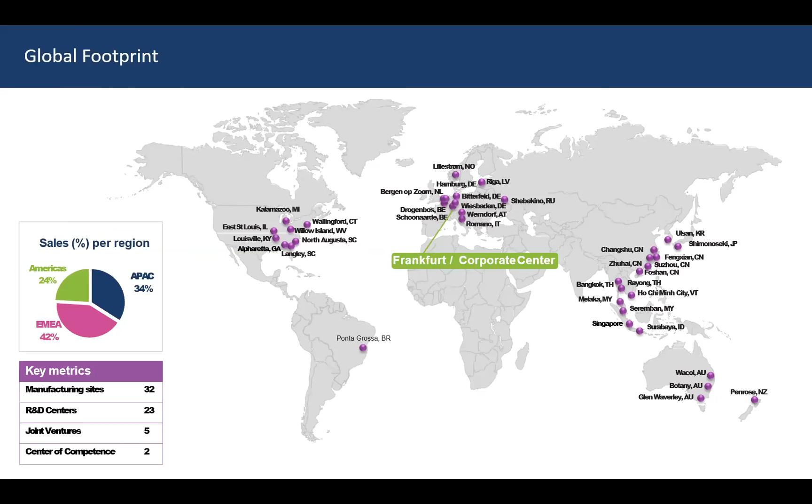I won't dwell too much on this - some general things on the benefits of fire retardant composites, general attributes. What do fire retardant composites offer? Well, from a safety and hazard reduction perspective, fire retardant composites assist to reduce fire losses, related injuries and deaths by reducing the probability of serious fires developing from exposure to ignition sources of different intensities. So that goes without saying.

Fire retardant composites also reduce the risk of potential human health hazards in fire situations. For example, properly designed fire retardant composite materials can increase the time to rapid fire development and reduce the size of the ultimate fire, thereby increasing the time available for escape and probability of survival for occupants - a common definition you'll find.

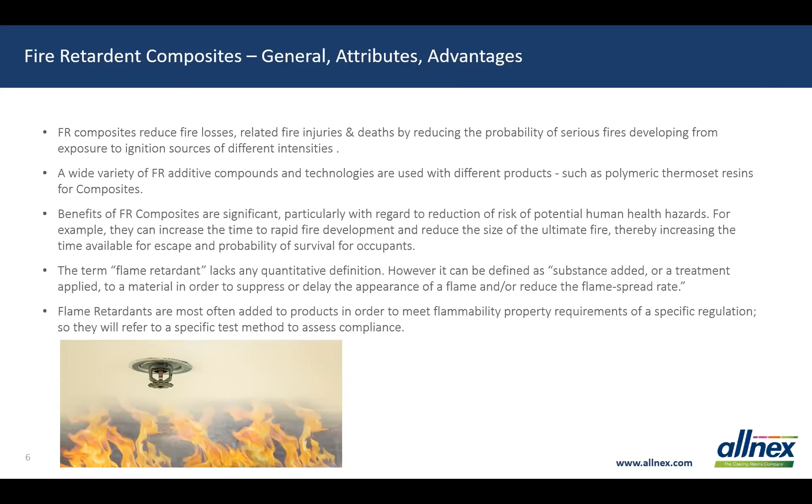So flame retardant technologies, just some general stuff. I don't want to dwell on these too much before we head into more information on what we're actually doing for this collaboration. But flame retardant technologies can be broadly classified into halogenated and non-halogenated classifications or categories.

Halogenated flame retardants basically contain halogens in their chemical composition, and halogens are elements in the group which include fluorine, chlorine, bromine or iodine. But as far as halogenated flame retardants go, bromine is generally, brominated compounds or polymers are generally the most effective, followed by chlorinated materials, which have also been used, then iodine and fluorine.

Those types of base compounds tend to be less effective and are not used. They are being phased out largely in a lot of applications around the world, for various reasons which we'll go into. How do they work?

They basically function in the gas phase of a fire during combustion, where they interfere with the chemistry of the flame by reacting with high energy hydrogen and hydroxyl radicals. This has a neutralizing effect, forming halide compounds. What this does is effectively stop the exothermic processes in the fire, the radical formation, which results in an overall cooling of the system, and the supply of flammable gases is also reduced and suppressed.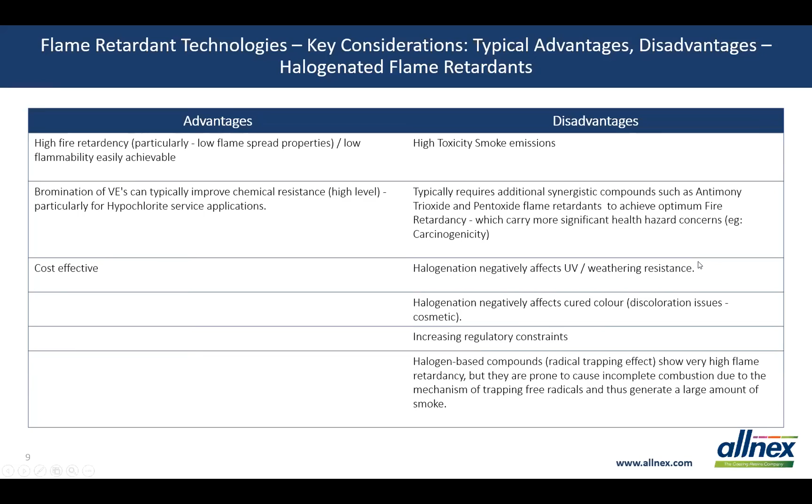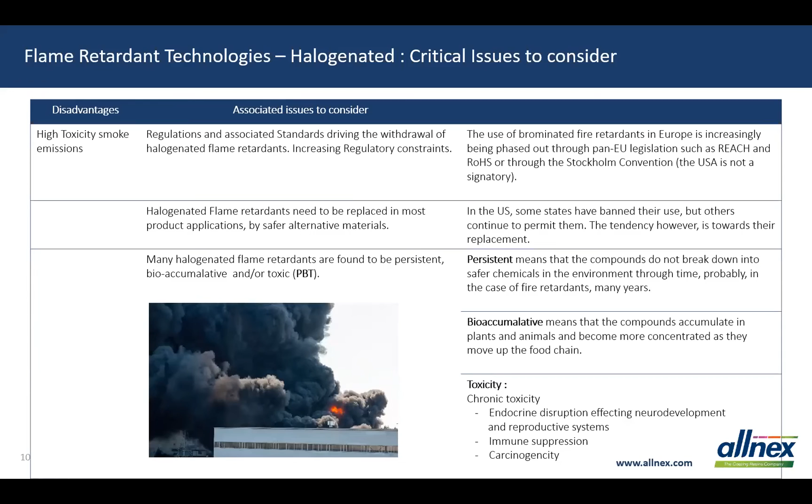So these concerns have largely been driving the withdrawal of halogenated flame retardant materials in many areas around the world and replacement with safer non-halogenated alternatives. There are increasing regulatory constraints specifying the use of non-halogenated flame retardants, and the fire performance properties of halogenated materials will not comply with quite a few fire standards written for many specific industry applications around the world these days.

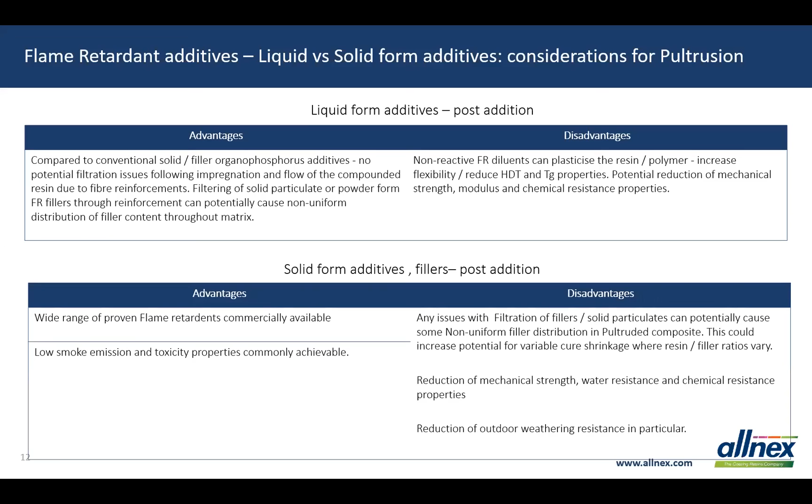For our current product development program, we've initially focused on liquid form flame retardants. They are non-halogenated class because, among other things, they provide easy handling and pultrusion line processing properties for Wagner's requirements. We don't have increases in viscosity or filtration issues with the filler, which can cause other problems. Some of these flame retardant additives can negatively affect critical flammability, processing, handling, and performance-related properties in the cured pultruded composite, so we typically need to modify the polymer or resin formulation with other materials to offset these effects.

In terms of the work we're doing to develop a fire retardant version for this particular project, a fire retardant version of the resin we currently supply Wagner's, which is a fairly high performance vinyl ester called Viapal 4838. It's an epoxy bisphenol A based vinyl ester resin, has very high heat distortion temperature, good line processing properties, and we're looking to see if we can modify that to provide these properties.

Now, for this project, the set of desired flammability properties of the cured vinyl ester composite was defined by these standards according to the guidelines. So these are the desired flammability ratings, to the different codes and standards that are relevant for this work.

We are focusing on UL94 as far as screening properties initially in the lab, trying to achieve an approximate V0 rating, the highest one possible. It's a simple self-extinguishing test, which I'll explain in a minute.

The other ones, the NCC, National Construction Code Standard, formerly the old Building Code of Australia regulations, encompassed other standards, including AS 1530.4, which comes up in this particular one. I won't go into that detail, just picking out one of those, BAL 40, which was mentioned by an earlier speaker, regarding the BAL 40 standard rating.

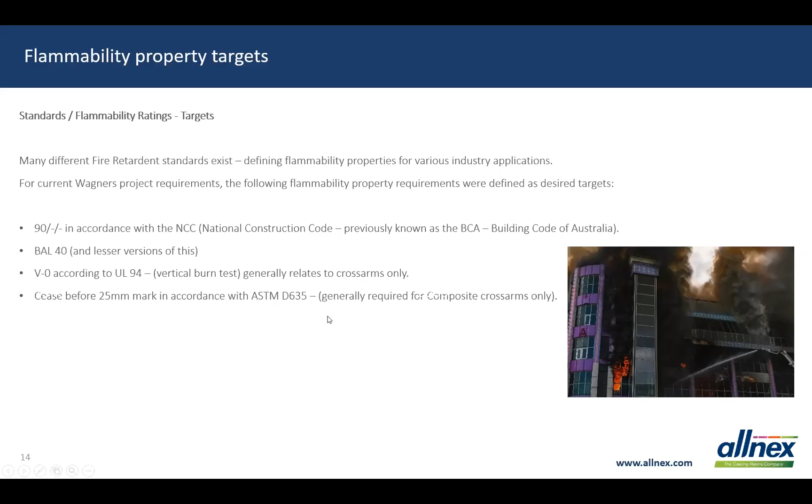Not always as easy as it might seem for a lot of materials, but it's a good screening test which we're applying in this case as well.

Okay, so onto our laboratory program and what we're doing - this is one area, one approach that we've taken, one of the three proposed approaches. We are working on approach one at the moment with a number of different additive approaches.

So in this, our resin development in this program is focusing on non-halogenated flame retardants to avoid smoke toxicity issues in particular, in attempts to meet the defined flammability properties and the regulatory and compliance requirements. But also, if you think about future-proofing these types of materials, for the likes of Wagner's, working on a non-halogenated system just opens up other opportunities for a wider range of potential applications as well, not just the poles.

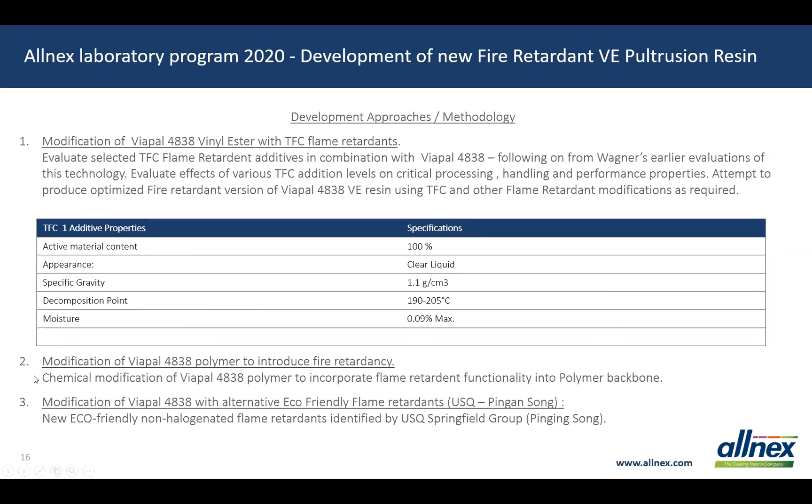As far as the fire retardant blends we've been playing with on 4838, I mentioned earlier that these types of additives can sometimes affect other properties of the resin, including the reactivity or the line curing properties. We look at SPI reactivity tests for basic characterization to see if increasing levels of this additive, this common laboratory method, cause any inhibition.

SPI reactivity tests are common for characterizing pultrusion systems for reactivity and assessing how they'll run on the line. In this case, this type of flame retardant can often inhibit the curing rate of vinyl ester and polyester resins. However, this particular material doesn't show any significant negative effects on curing at all, as seen in these results, and the catalyzed pot life appears largely unaffected. So it's quite inert in terms of not affecting the cure, which is positive - a benefit given we're talking about elevated temperature curing. It's harder to achieve an inhibition effect compared to room temperature cured resin systems, but we were quite happy to see no such problems there.

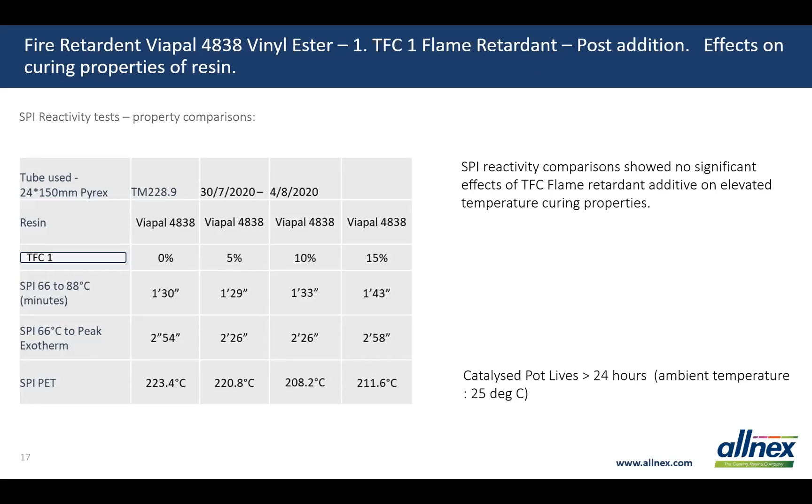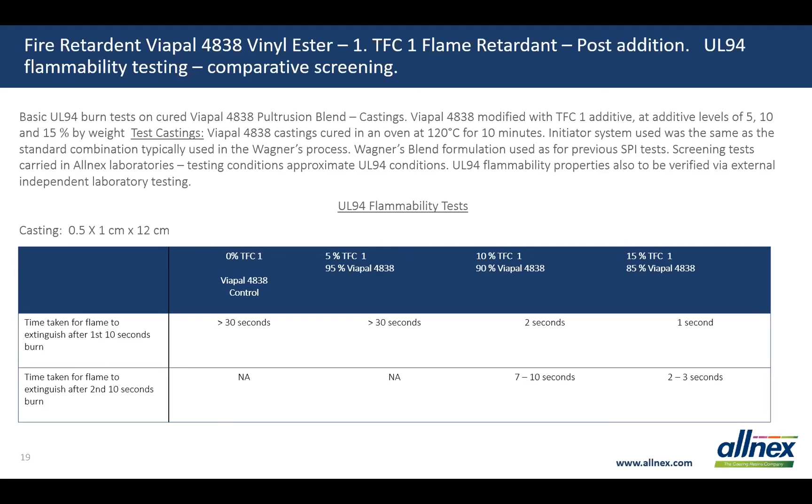The problem is, as I mentioned before, another issue is that these types of materials can sometimes plasticize the cured matrix. So at the addition rates we're looking at with this particular non-halogenated flame retardant, we did see quite a significant reduction, which was not unexpected given our past experience with similar flame retardant materials. This liquid flame retardant did drop the HDT as we increased the level, which is a bit of a problem. Heat deflection temperature is a fairly critical property in terms of heat resistance, so we needed to look at other ways of altering that.

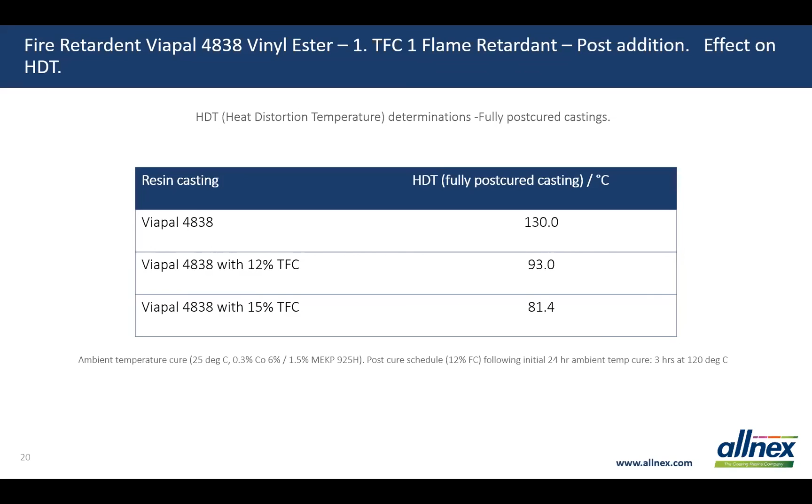One way was to look at synergistic, other additives or flame retardants in combination with the initial TFC additive. Initially we tried another synergist that was suggested, an industry recommended synergist - it didn't work. We tried a few options. However, one particular reactive non-halogenated flame retardant, which we'll call HP1, did actually allow us to reduce the TFC level in the formulation.

This new flame retardant is also in liquid form, so we've maintained those good processing properties, potentially for the resin in a pultrusion process.

But where this one differs from the TFC is that it's a reactive material. It actually reacts and cross-links into the final cured resin structure, so it doesn't affect HDT. We could reduce the TFC level in the formulation by using this material in combination, getting a synergistic effect, achieving the same low UL94 flammability results with a lower amount of TFC, with the aim of maximizing HDT properties.

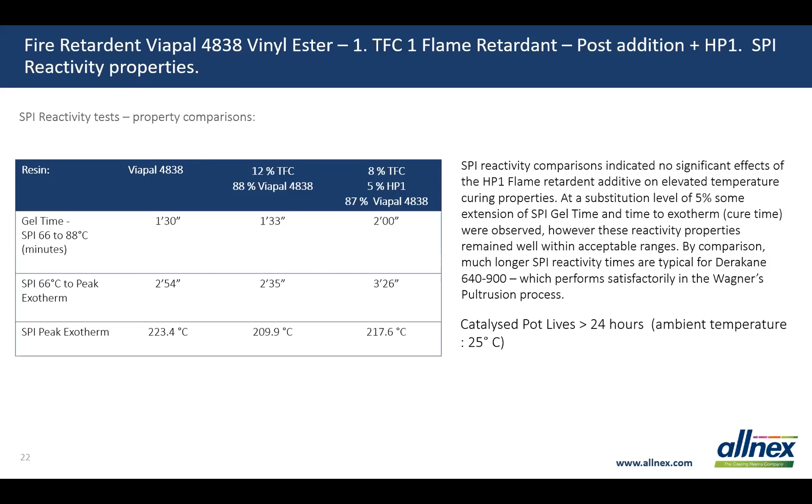Heat distortion temperature - as I mentioned, by incorporating a combination of the two flame retardants, we managed to reduce that plasticizing effect by reducing the amount of TFC, and we brought that HDT back up to a reasonable 116 and a half on this test.

The Viapal 4838, this was another test - 130, 135 typically, each time you do a test you run another control. But it's a lot better than the 81.4, or the maximum we could get down to from the previous test without the modification with the new reactive flame retardant. We're quite pleased with that one.

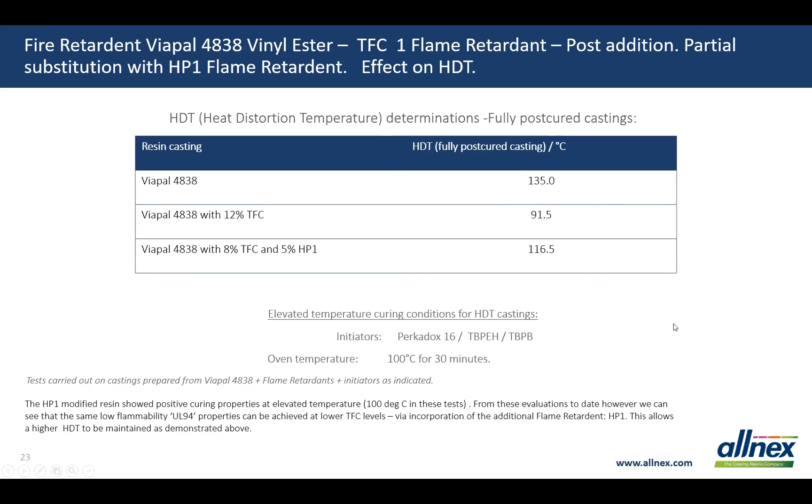Further work we need to do is optimize the ratio and formulation levels of these two flame retardants for this particular part, to maximize the UL94 fire retardancy properties and maintain maximum HDT. I believe that's been done.

We're at the stage now where we want to prepare some small trial batches and lab batch samples, which I believe the guys can run at USQ, possibly at Wagner's as well, in a smaller scale trial. The main reason is to look at the line processing and curing properties. The guys can have a look at this through their DEA analysis tools as well, to compare against the current non-fire retardant version of the resin.

We also need to produce some test laminates and pultruded representative laminates for outside fire testing - external UL94 fire testing, with a few options including USQ's rig for initial internal testing. Depending on those properties, and if we can confirm a V0 verification is required, we can look at further outside flammability testing for BAL 40, the NCC, and the ASTM D635 requirement.